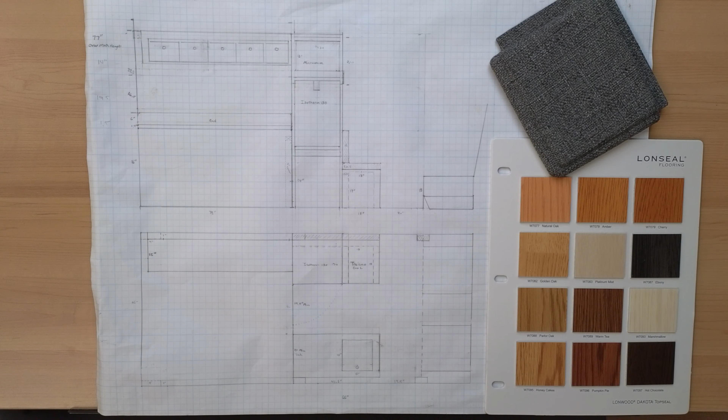Vanbuilder layout. So over here, what I've got is I'm making this video to send to a customer that I'm doing a quote for, and we're going to go over what their sketch is right here on this side. I'm going to talk about this one just so you get an idea of kind of something I start with, and then do something that's going to be a new build.

So this one is John and Susan's dimensions for their layout, and then the second one is the next one. Over here, I've got the marathon fabric that we're going to be using,

and again, this is just a proposal quote, so all this stuff can change, but they're looking at going with, I think, this Honey Oak - it's kind of like a golden color, like a wood floor type thing.

Again, my last video was talking about Lonseal, and this is the Topseal version. So this has that extra layer of protection, which you definitely need in vans. So we'll go over this stuff later.

I'm going to take this off. So if you guys have a question about it, let me know.

The main focus of this video, I'm going to be sending this link to this video to them, and I'm going to be going through this. That way they can watch it, get some ideas of the concepts that I'm thinking and the parts that I'm going to use to make this possible.

Because I finished up the numbers part of the quote. So if you guys were following in the last live stream, what I did was I put together this. So this is an Excel sheet.

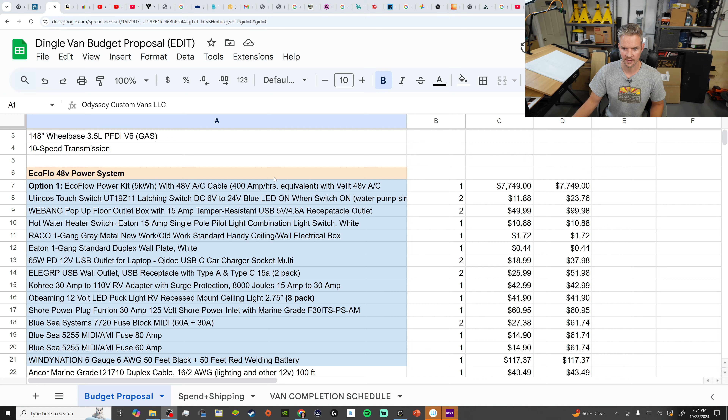It's pretty straightforward. This is going over everything from our phone consultation and kind of bringing in those details up into some emails that they've sent me between now and last week. And this is what I put together.

So this is just the core of like the power system, solar, the heater, water tank fittings, windows, kitchen items, interior, walls and systems. So this will be interior walls and systems and stuff like that.

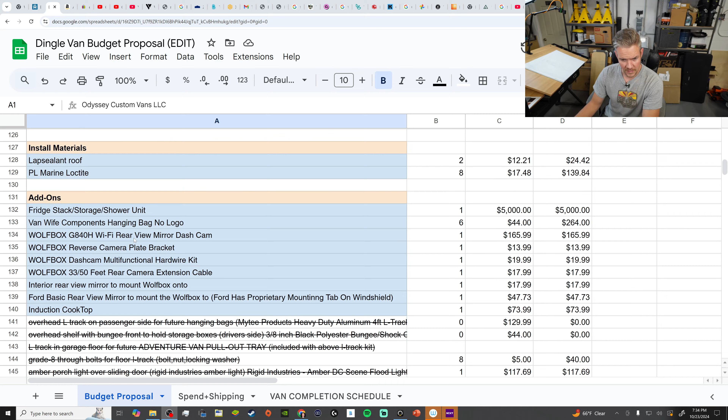Anyway, we'll go over this in more detail at the end. I basically wanted to get this put together so that they have a place to get started when we hop on a phone call and take the next steps. Okay, so yeah, we'll reference this later.

I want to focus on the front of this video, answering the questions that I'm sending to them. So let's go to the van cam, which is actually the drawing cam today.

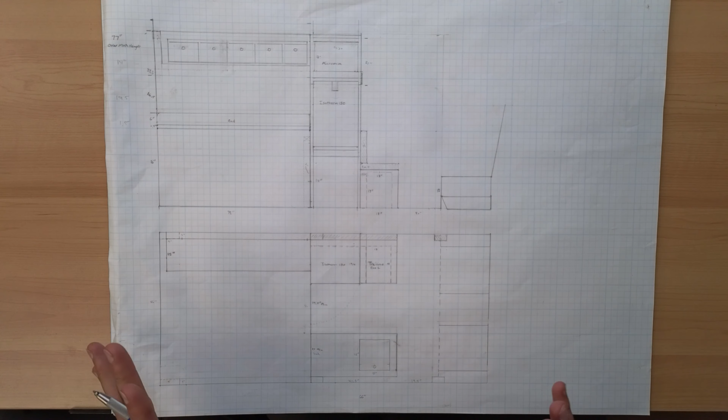All right, let's get into it. So, even though I went to school for engineering and I used to do 3D modeling and stuff like that, I've just kind of been a pencil and grid paper type of person. It just takes too long for me to do it up in the computer.

I make a lot of changes when I start to sketch stuff out, and really, this is what I made for John and Susan's build, and it's all I needed. I didn't need to change anything. I can actually put all the little nuances and dimensions on here.

But long story short, this grid paper that I'm using, let's see what this is. It's a 17-inch by 22-inch grid, and they're 4x4 grids. So the way that I do it on this 17-inch by 22-inch paper with a 4x4 grid is each box...

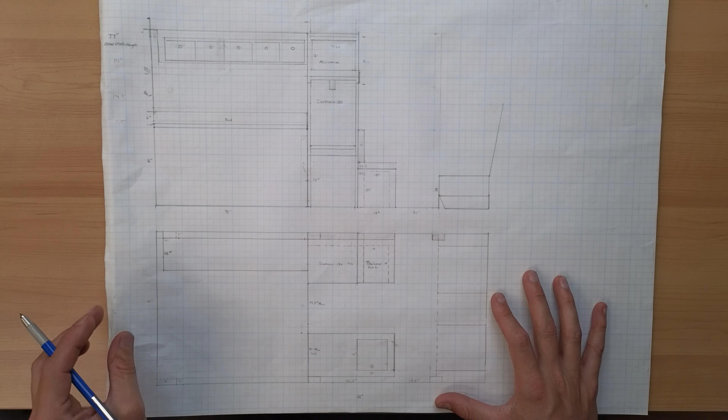This is the top-down layout, and I'll show you this again at the end of the video. I just want to stay on this for the front part of the video. This is the top-down view of John & Susan's van. This layout is getting really close to what this customer is looking for with their layout, and they've already sent me some AutoCAD drawings with measurements and layouts. So taking that into consideration, I did the quote for all the materials, and now I'm trying to make sure I can fit those materials in the van.

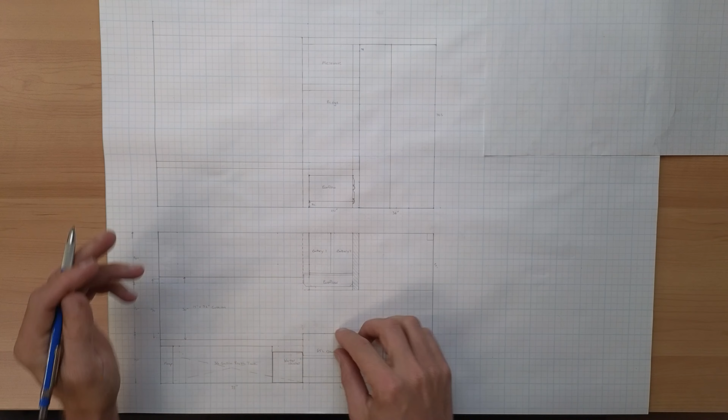So what I'm going to do is over here on the left-hand side, I've got the same dimensions put here, but for a different van layout. What I'm considering for their build is we're going to have a dinette set up here in the back, which is what they're looking to do. So we have this 6-foot bench seat for the dinette, and back here you can see we've got the dinette right here, as well as the second seat for the dinette.

For balancing out weight, I'm trying to either do the batteries on this side and the water tank on this side, so we'll see where that actually ends up. But their main ask for this is a shower, and a shower large enough to be comfortable in.

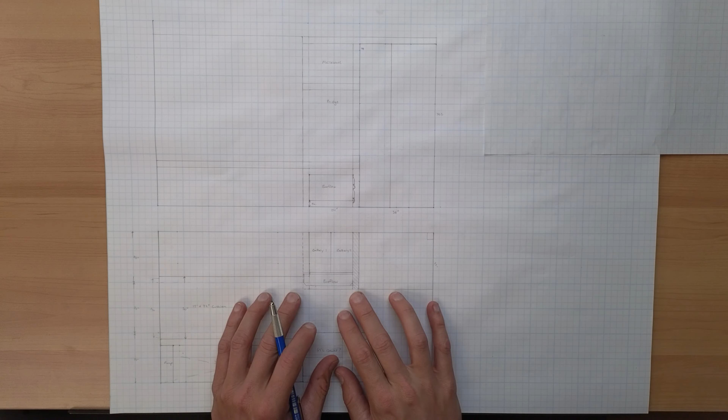A lot of DIY showers... I like to go more to the professional side, where a pre-fabricated shower, although more expensive, I think long-term has no leaks, and the robustness of the installation is what I want. I want something to last for a long time. I don't want to have a van come back and have to be repaired because I went with some type of wood construction, and the van was moving and the seals became loose and it leaked or something like that. So with this shower, that was our ask.

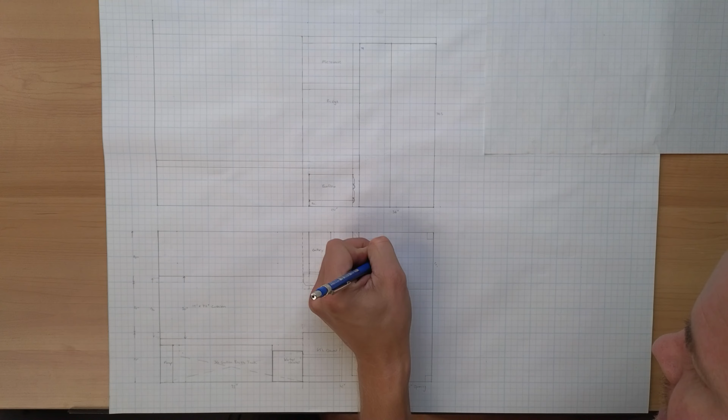So we got the shower here. And Jamie, if you're watching this stream, let me know if this video quality is good enough that you can actually see the van, this drawing. I'll zoom in just a little bit.

There you go. Okay, so I'm going to hop on the computer. There's a company called Vanbuilder Components, and I've encouraged a lot of other companies to make a shower construction offering, because I have seen some at van shows. So what I want to do is suggest that we use their 36-inch shower. So here's the 36-inch shower, see what it looks like.

I'd like to do it in white, and the reason is when you're inside the shower with a black powder coated one, it just makes it really dark inside. So I want to go with this one.

What's nice is on the web page, they give you really nice dimensions that you can see here. And these are great dimensions, because not only does it fit what I did for John and Susan's van - now, John and Susan did not make a shower, they opted in for a third seat that also housed a toilet.

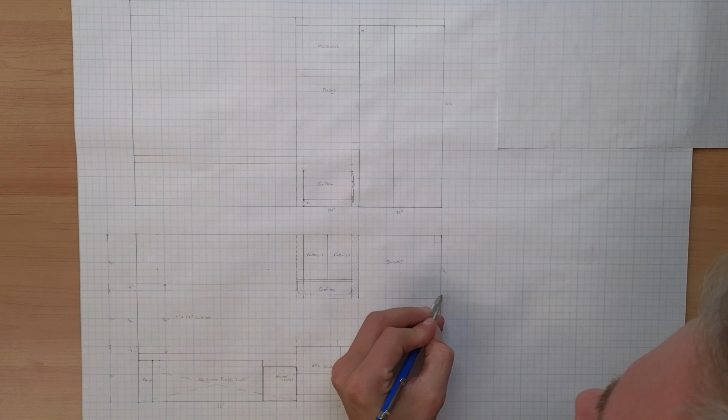But now when we get this shower, one of two things are going to happen. Either I'll have to shift it back towards the back or towards the front in two different positions. So if I go over here, right here is where I've got the shower at the moment. So it may need to shift back here to the back. The reason is there's not corrugations, but there's supports underneath the frame of a Ford Transit.

Depending on where you lay that shower, the drain is where that's going to need to drain out into the tank. So it's possible I may move the shower back, because underneath the van here we're going to have a 20-gallon tank for the shower to drain into. And underneath here you've got a fuel tank on this side, then you've got the water tank right here. Over here in this back section, you have just enough room to tap into the tank.

If it's possible, I know there's a channel right here, and that's where I ran the second alternator wiring from Brian and Robin's build, so they might be able to have a drain there. Regardless, the shower, I think, from Vanbuilder Components is perfect. So again, that's what it looks like.

So that'll be there. And the next thing we're going to be doing is I'm suggesting the EcoFlow system, the 10,000 watt hour battery system. They can opt in for just the 5 kilowatt hour, but current pricing, it's more expensive to upgrade a battery later than to include it in a kit, so I think they need to take advantage of that.

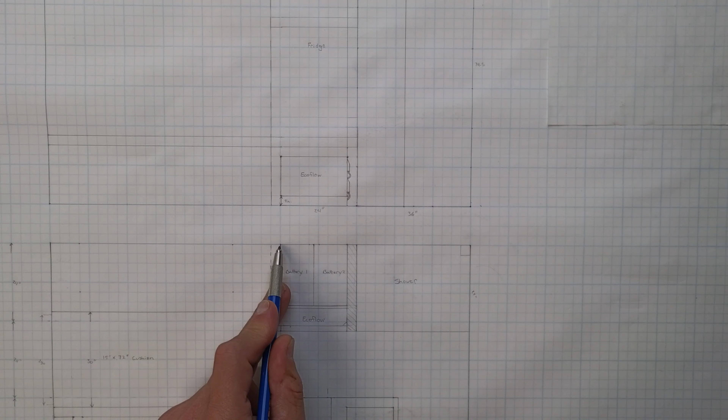But I've laid this out over here, and I'm going to be able to do the... let me zoom in. Okay, so right here we've got the shower, the driver's seat is right here, and then we've got 2 EcoFlow batteries. I think the batteries are about 19 inches by 10, 11 inches high.

And then this EcoFlow box here requires 4 inches on each side, which is pretty aggressive, so for this space we'll just do 3 inches on each side. That's going to give it plenty of ventilation. We'll vent this front panel here. And now remember, this top picture is the side view, and this one down here is the top view, so that's the difference here.

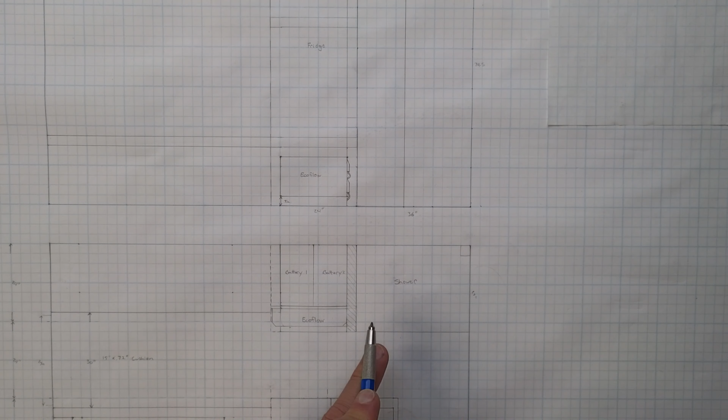So we've got the 2 batteries and the shower, and then you get that 20-gallon water tank. So we need to make sure that we're not making the van unbalanced. 20 gallons of water, that's a lot of weight. Then these 2 batteries are heavy, and the shower system itself, and the refrigerator, and up here if they decide to get a microwave.

So that's another thing, the microwave up top. This area up here can be different, so we don't have to have a fridge here, we can do a fridge into the kitchen galley. It's going to be 65 liter versus the 130 from Isotherm. So if you want to repurpose this for a hanging closet or additional storage, this is the additional storage section that was a request. They want to have a lot of storage, and this is where we'd be able to do that. So we could make a smaller fridge here and have this area be more storage oriented.

But getting back over here to the driver's side of the van, we're going to have this huge seat, 6 feet by 3... 6, 9, 21, so you've got 6 feet by 21 inches. And it's going to be about, let's see how high that was, 18 inches. So 21 by 18 by 6 feet, and that's just going to be completely open storage. You can put whatever you want in there, so a ton of storage over here, we'll keep that open.

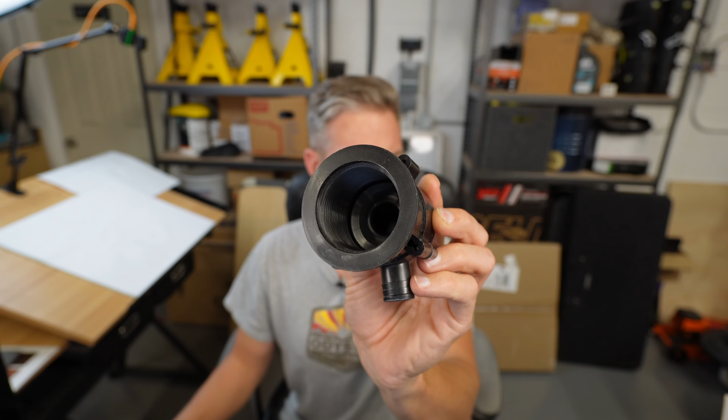So someone was concerned about not doing P-traps and the smell. My recommendation is you can have 2 different worlds. You can have one where you get this, let me pull it out. So you can have this integrated P-trap, which looks like this. This is what most RVs have. So it goes to a normal sink drain and then goes to this half-inch outlet.

The problem is this has an integrated P-trap, but the flow rate is really, really slow. So if you're okay with that, you might have to get to a point where you actually have to turn the shower off, let it drain. I don't think that's what you want to experience in a shower. So what I do, and this is where somebody questioned me on a video, is I have a direct flowing drain just like you do in your house, minus the P-trap.

Now, my thought behind that is there's a stopper in the tank of sinks. So you're going to be able to put the stopper in, and that way your smells don't come into the van, if there is any. So that's the way you control that. The benefit is you can use your sink like a normal household sink. It's going to flow into the gray tank just like normal. The shower, same thing, it's going to flow into the tank just like normal. So as long as you have a drain that you can put a stopper in, that's my recommendation.

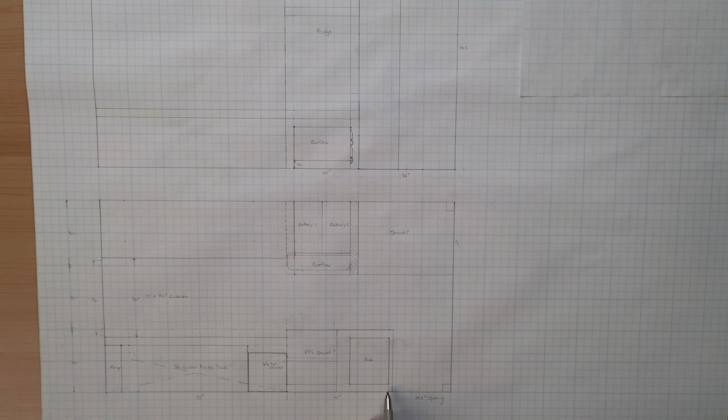If you're not going into really deep freezing environments, I think it's a good idea. Because what you can do is just pour a little bit of RV antifreeze down the drain and just keep it kind of sloshing around in the tank underneath there, and then just keep the tank drained. Now what you can do, you can always have an undermount tank for the gray water and just have an extra jerry can inside in case you're going into freezing temps.

And it should be kind of obvious, you just drain the tank underneath your van on the passenger side and just only use the tank inside your van. So you got options.

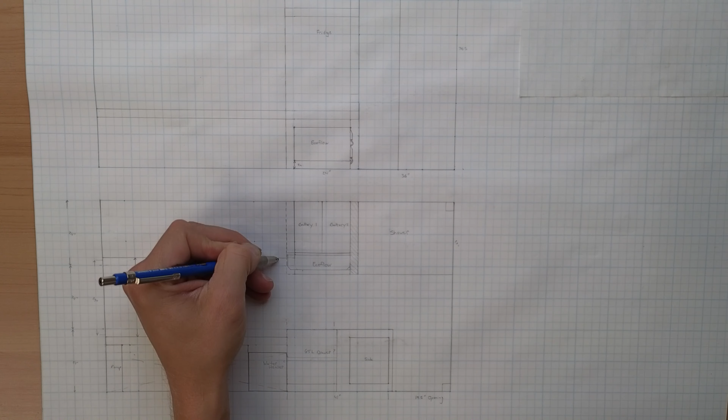The water heater, we're using a 4-gallon Bosch. It's just a small residential hot water heater. For this build, we will be crossing the lines inside the van, but it will be under the floor. And I know that gets some people kind of worried, but I do not worry.

We're going to put the polyiso down. We're going to have the PEX lines, PEX A, very robust plumbing. It's going to go from one side, under, to the shower. And so you'll have insulation underneath it, the floor on top of it.

And what I'll do is there will be a gravity drain right here underneath the sink area, so that if you think you're going to be in an area where you won't be able to access the van for a while and you need to drain it, you'll have a nice gravity drain over here by the sink.

Whenever I drain a van, there's a drain in the very back here. So it's a 1/2-inch valve drain. It's pretty slow, but...

You're cutting less out of the van, and to get the tank to dump fast, you waste a lot of area back here that you need for the pump and the valves and stuff like that. So the 1/2-inch line is just nice and convenient.

So you have a drain here. If you want the van tank to pump out faster, just put your hose in here, turn the pump on, and as this is draining, go ahead and drain with the hose as well. That way the pump is pumping out the water and gravity is draining the tank. So it's kind of a win-win on that. So that's my recommendation.

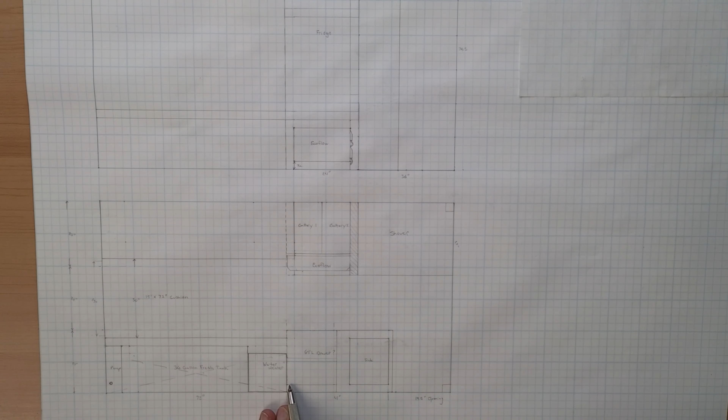Yep, we got the Lonseal floor. We'll do everything just like we did in past vans, where we fully insulate the floor. This van will actually have, we're going to do this system.

Actually, I'll make that call when we finally do some final numbers. I have the flooring kit from ABC Rig in here. This is just good because it does include the step and trim and the flooring and the insulation, and it's pre-cut out. This is more of a speed item.

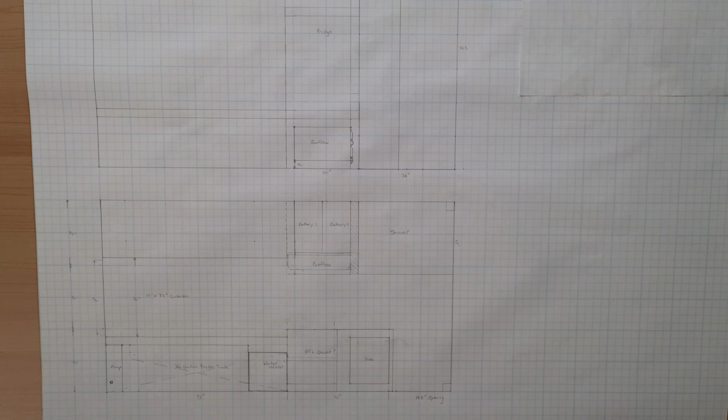It takes me longer to do this one-off. So this is the transit insulation and subfloor system with step and trim from ABC Rig. If I do it one-off and cut it here in the shop, manually installing the vinyl strips, the floor, and all that stuff, it takes a little over twice as long to install that system.

So this flooring system is already ready to go. It's in 3 pieces. It gets shipped here. It's already pre-insulated and pre-CNC cut. So I do like that.

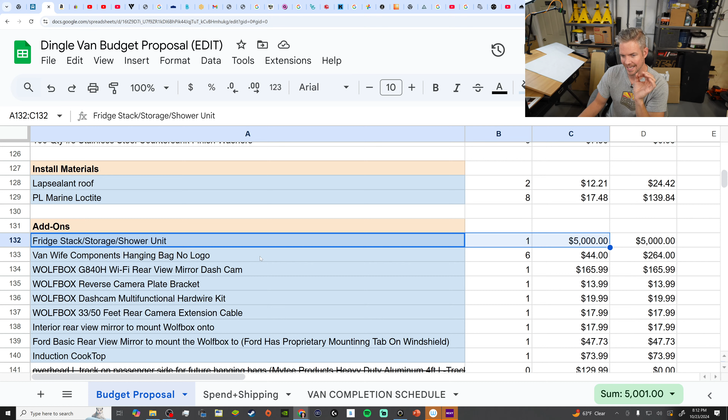Yeah, so this is the higher number for parts, if you guys are wondering. So I probably went, this is probably right at exactly 40,000. It's at 44,000 because there's 2 things I'm not sure that we maybe or maybe not doing, like this fridge stack and shower unit. That is just a ballpark range of doing a custom built-in around the shower area for the microwave refrigerator. If they don't want that, we'll do something different. That's just kind of a placeholder depending on what we're going to do.

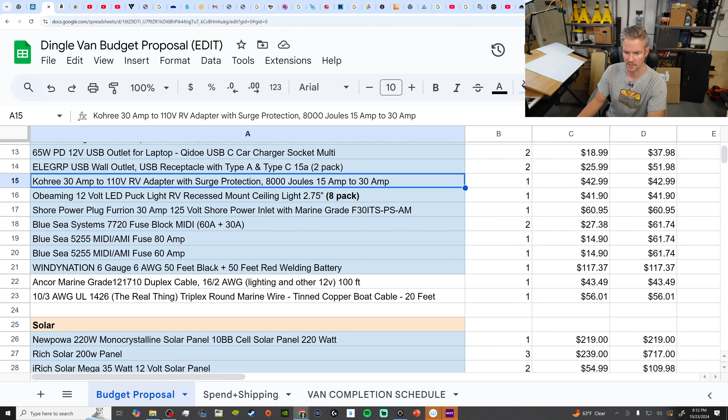So I put those placeholders in there so that when we look at a number, we usually have the higher number first, and then we can actually chip away at it. Or if the higher number works and they want to add more, it's a more black and white way to do the van build. Because this is exactly what I'm purchasing, this is the exact price of these items. So if we change out wiring or we change out the EcoFlow, for example, I actually need to change this.

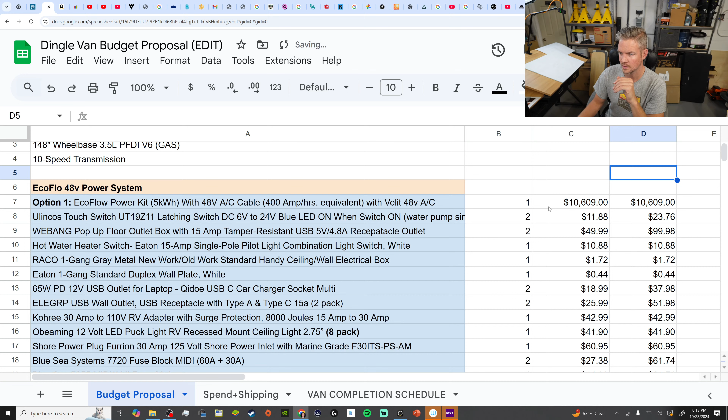So this, because I want to, let's see here, 10609. So let's go, so this is 10609. And then we'll bring the formula up. And this is our, we want to go to 10. There we go.

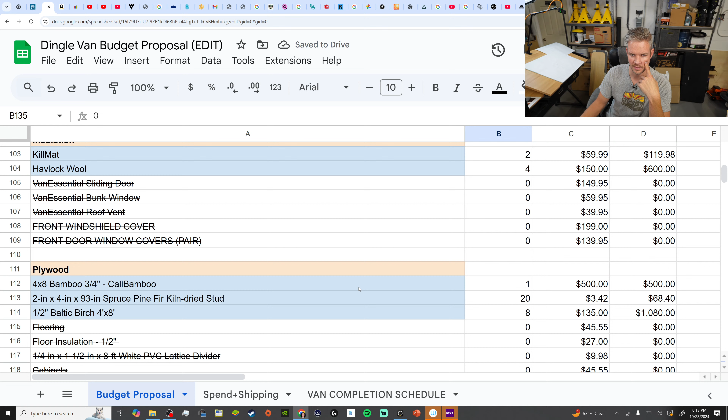For example, what we can do is, I'll just show you here live. So here's some hanging storage, and then we can just go through and zero out this stuff. You know, maybe zero out the cooktop, they might want to get their own. And then let's see if there's anything else. They did want to do the background. Let's see.

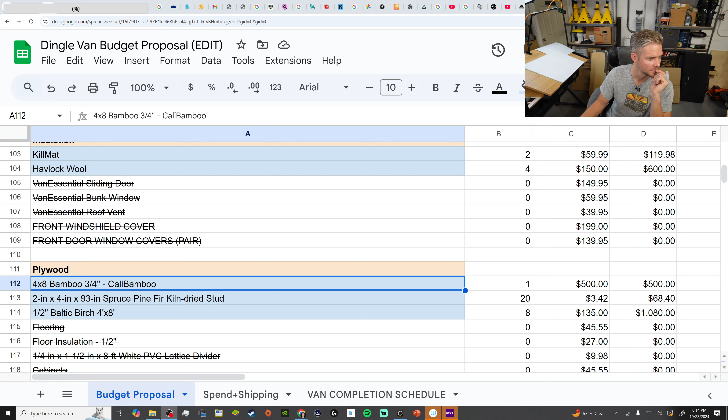What is this? Browser sub alert. Okay, hold on a second. I need to add something here. There we go. Okay, I had it turned off on this screen. Now we can see who subscribes on this screen.

All right, Cali Bamboo. They did mention they wanted to have that bamboo backing, so I got that. These Lagun tables, we got to figure this out because we're gonna. Yeah, that's one thing that would change the price.

Air fryer. This is a microwave. The window, this is a CRL window.

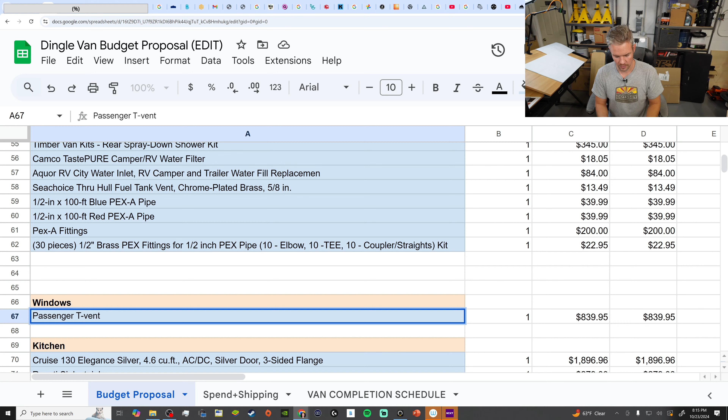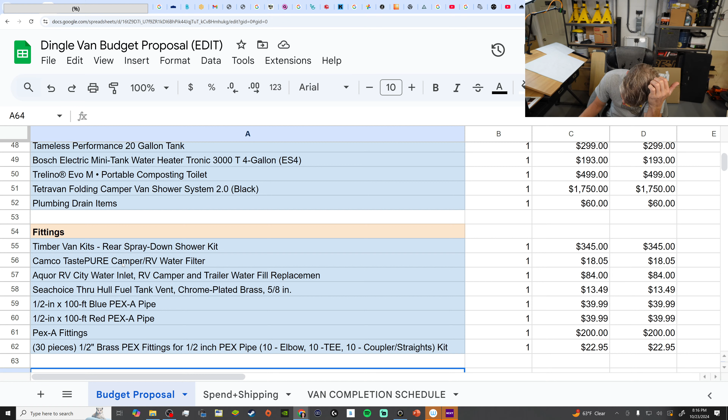Just some PEX fittings. PEX fittings are very expensive, but they're worth their price, in my opinion. But when you do PEX in a van, just map it out with a drawing, make sure everything's nice and neat and laid out, because since they are expensive, you don't want to mess up as you're connecting some stuff, because 3 mistakes could be like 30, 40 bucks. So this, okay, where did I?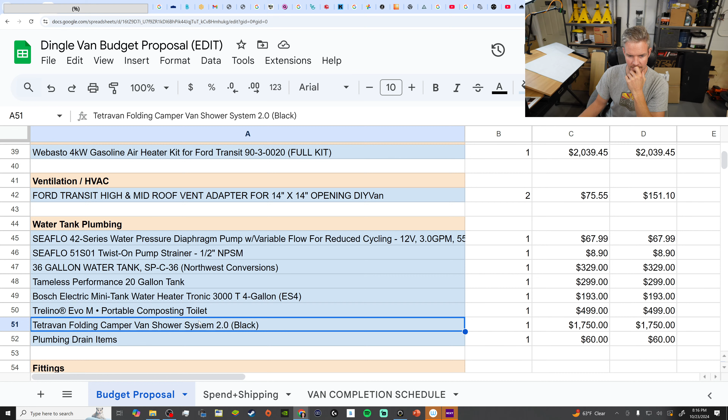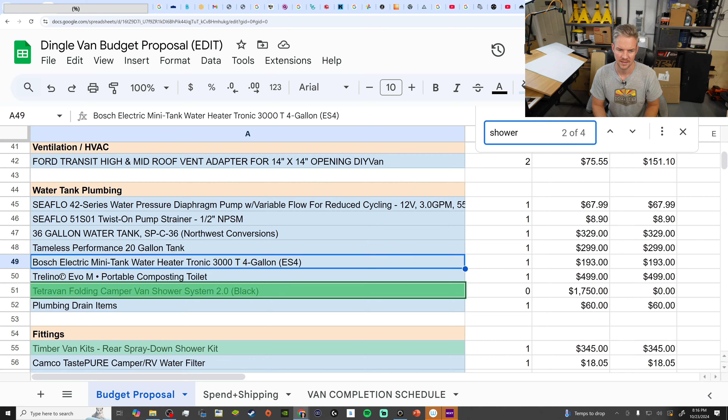This is why you double check everything. Okay, there's the Tetravan. Let's see here. Okay, so I didn't update this. Okay, so now we need to go and put the...

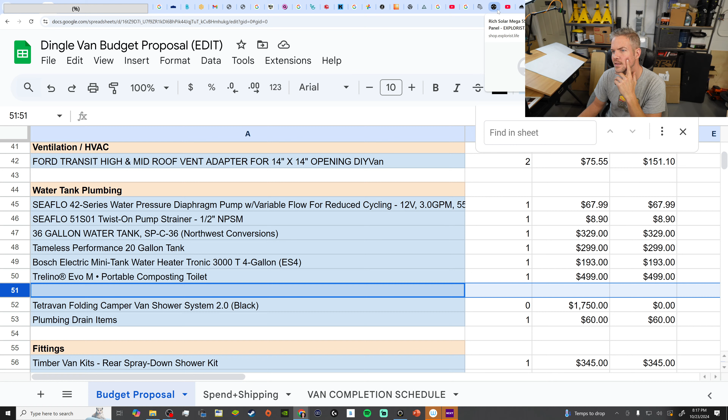Okay, that's actually cool. Campervan HQ actually has this product.

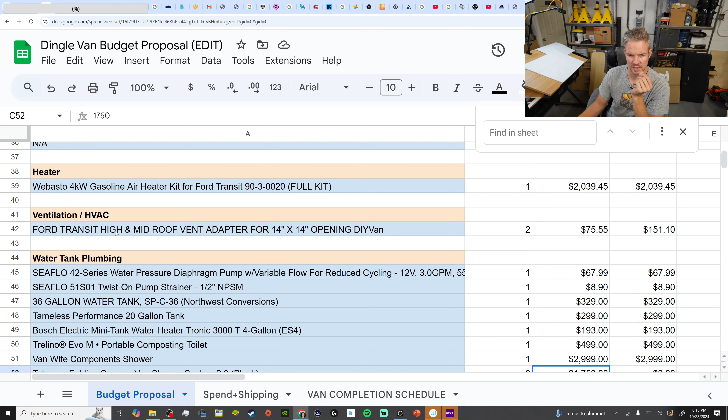So we got a Ford Transit high and mid vent adapter. This will be for the AC unit. We're not doing another MaxxFan, so we can take that down.

I've got the 4 kilowatt gasoline heater, and I've got this one, the more expensive one, because I'm actually a Webasto certified installer and repair at the shop, which is pretty nice. I took a course and got certified in that, so that's pretty cool.

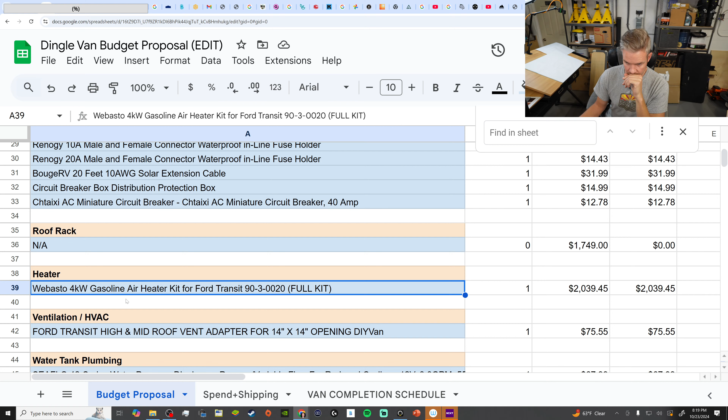But the 2 kW heater does not do automatic altitude adjustment, so if you think you're going to spend some time up in Colorado or something like that for more than 2 weeks, or at elevation in general, it's better to get this one. I think it's only like $300 or $400 difference, but the 4 kilowatt is going to do auto altitude calculation or adjustment. It'll do it behind the scenes, you won't even know it's doing it.

Now, one thing, let's see, I did not add this. So I go to a company called VMACS, and they have these heater kits for vans.

So if we go to gasoline and we go to Webasto, and actually let's take off Webasto, let's go to Ford. So there's a 2K and it is $1,700, and then we've got the 4K. Okay, and this one has the Bluetooth kit, which is really cool. So let's just go ahead and change that, 2639.54.

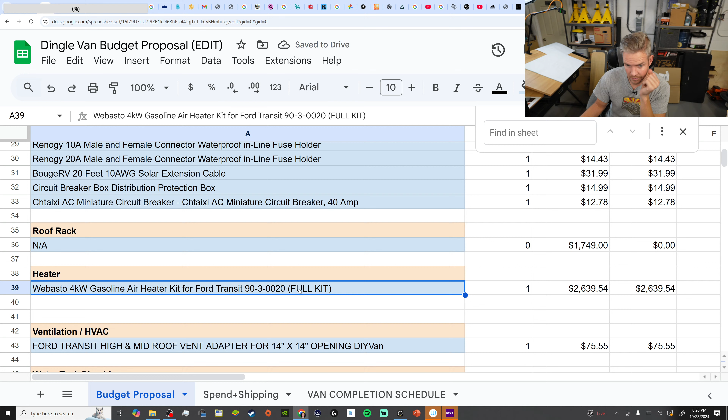Okay, let's make sure we get the right part number. All right, so now we just go through and so 48.5.

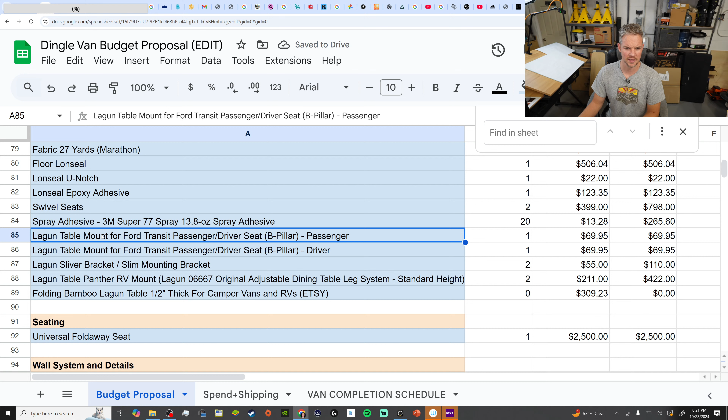Okay, so these Lagun table mounts, these two are ones that we're probably not going to use those. They go from the passenger and driver side, and so if we do the shower or the refrigerator, we won't need it for that.

So let's do one for the passenger. Slim mounting bracket, that comes in the kit. We need one Lagun table. Let's just do, we got 2.

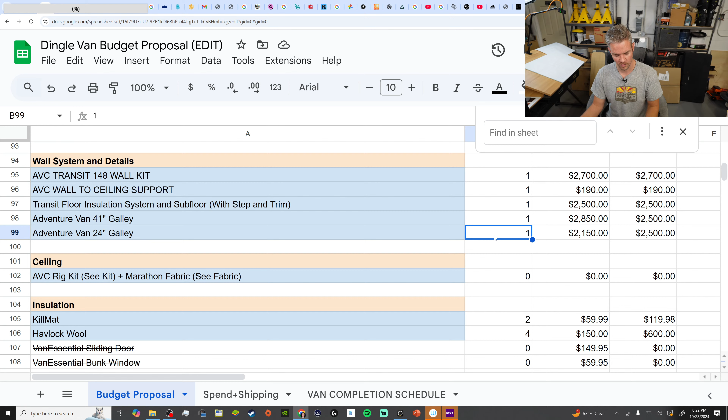Oh, the fold-away seat, there we go. That's the big one we're taking off. I think they don't want to do that. 24-inch galley, we'll take that off.

Okay, so now we're getting back into... so we do have 2 swivel seats on here. I'm not sure if they want, so we're just gonna do 1, because that driver's side will be not usable. This is a 22-gallon tank.

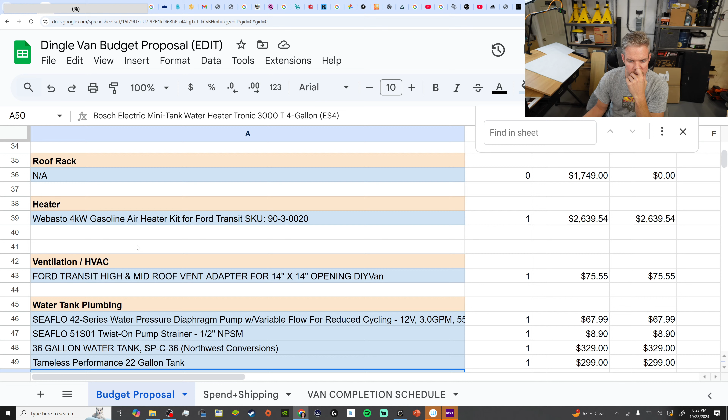Okay, the last thing that I'll talk about in this video, again let me know what your questions are. The last thing is this Go Code Overland. They have 2 pieces of kit that were very challenging to do manually, and now they actually make a thermoform plastic version of both pieces.

So the first one is the Ford Transit D-pillar trim kit, and I don't know if... okay, so I didn't put that in here. We need to put that in here. Okay, so this Ford Transit D-pillar trim kit.

I got to check my other computer because I added some stuff last night and it may not have come over. The live stream rig and the other computer are separate. Okay, that's the wrong formula, there we go. And I'll check the formulas too before I send this over to them.

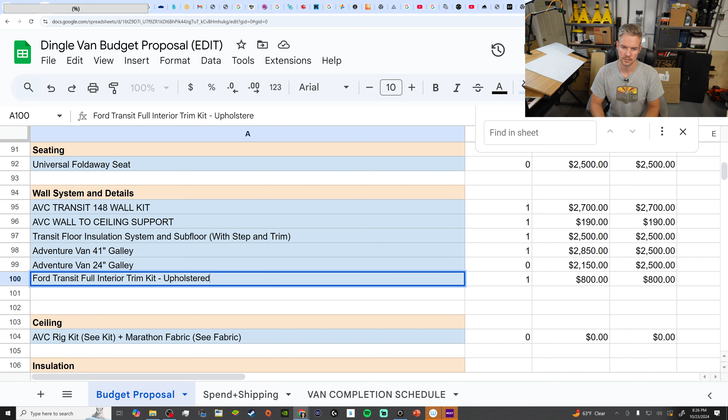Am I butchering that? Okay, that is...

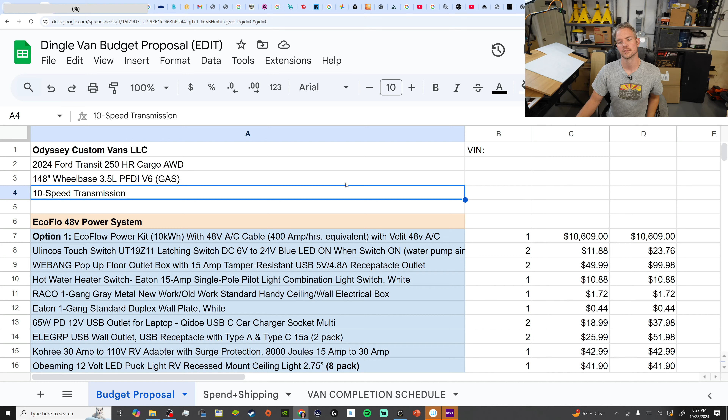Okay, I think that's the last thing I wanted to add to this quote. All right, so I'm gonna go clean this up and send this over tomorrow.